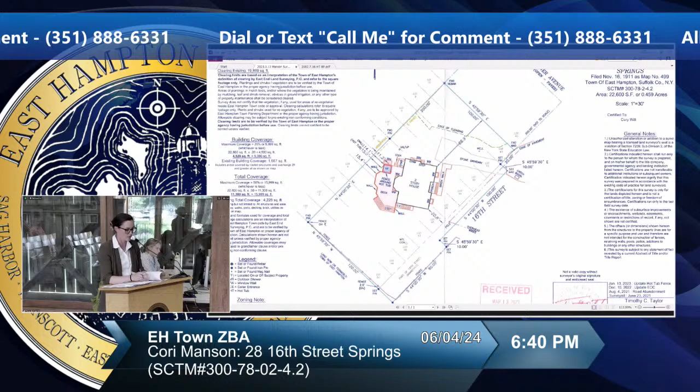Of course. Was the hot tub built where the permit was given, or did it deviate from that? I apologize for cutting you off. I do believe that the previous permit was submitted for the same size hot tub. I know that the deck at the time was a smaller deck, I think it was 400 square feet.

Now this deck is, I believe, 900 square feet. I can have Ms. Manson speak to that if you'd like, because she's here. Yeah, just to see if it's in the same location and the same size, right. Probably, some of the submitted plans or survey at the time would show that.

Manson, at that time her last name was Witt, I believe. So this is still the same applicant, same owner. I just think it was an issue of cost at the time. And then in 2020 she was able to do that.

And then she just didn't apply for the new permit until after it was constructed. And we have it here. That's the proposed one, Morgan? This is the building permit survey. Is the building permit the same numbers for the hot tub and the deck at that time as now? It seems like it's in the general area.

It's really hard to tell, I don't know if it's like this round thing here. This is just what's associated with that 2002 building permit. It's kind of hard to tell. It looks like it's kind of in the middle of what was supposed to be the deck, but I'm sorry Morgan, I can't hear you. It's just hard to tell based on this, this is the only survey associated with that 2002 building permit, and it's just not super legible. So it's kind of hard to tell. There's maybe a little sketch here of where it was supposed to be, but it's just hard to say definitively where it was proposed to be.

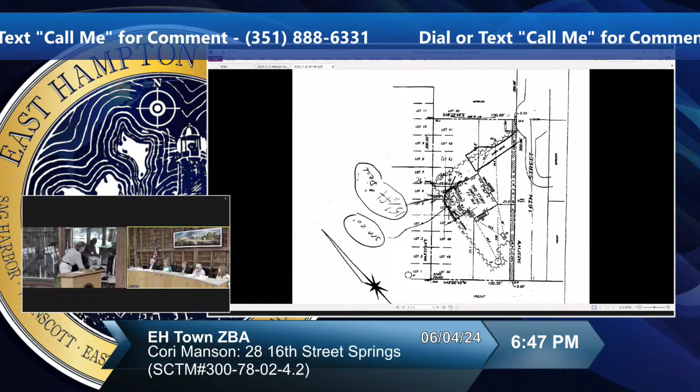It's kind of a mixture of shrubs and oaks. There's really two affected neighbors along this property line because it's quite long, but there's only like one actual residence that would be impacted by the variance.

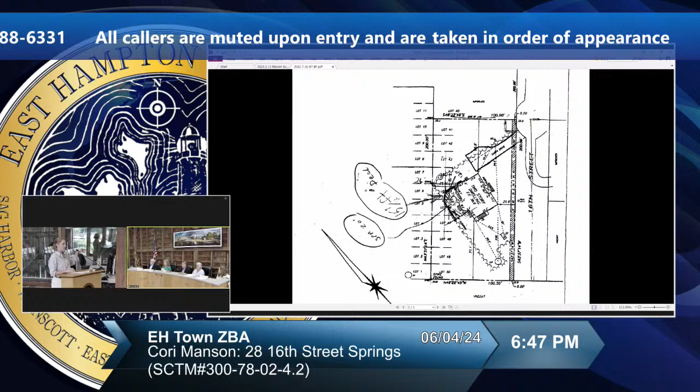Good question about the amount of decking. On those two permits that expired, it was 400 feet, and then there was a subsequent permit in 2018 for 900 square feet. Let me pull up the permit - so was it the 900 that was built, or is it a total of 1,300? Let's see, so in 2018 it was 900 square feet, which I'll pull up so you can look at the plans for it.

That seems to be accurate to the existing conditions on the property. Obviously they don't have a CO for the deck right now, so it's kind of hard to say exactly what the square footage is, but this appears to be close to what is there on the property today, and it's for 900 square feet. So it's not 1,300 - that 900 includes the 400.

I don't think the 2002 building permit - it was closed in 2010 because the work was never initiated. So there wasn't a deck, or maybe a smaller deck, until the 2018 building permit was opened, and that is the deck that is currently there. The hot tub was not actually there in 2002 - the work wasn't completed. The 2002 building permit was for a hot tub and a deck, but that work was never initiated, so it was closed in 2010. Then another building permit was opened in 2018 just for the decking, and then the hot tub was also installed.

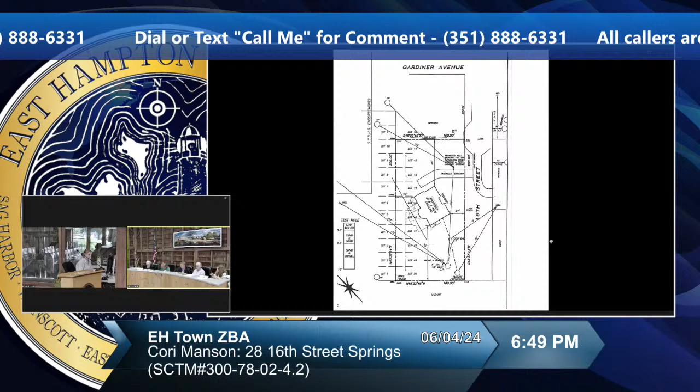Can I just clarify - I know that the hot tub size makes it classify as a pool, and therefore the pool on the deck means it's a pool deck, so the pool deck has to conform to the setbacks. But does that whole 900 square feet have to conform to the setback, or is it just where the hot tub is?

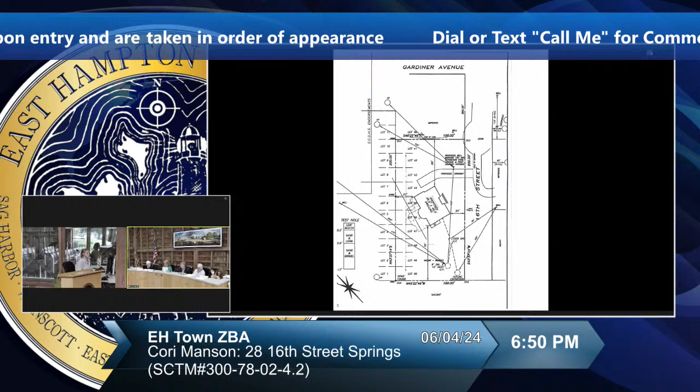Well, the relief sought is the maximum variance that's requested. So if you approve the variance that's requested, then you'd be approving anything that has a larger setback.

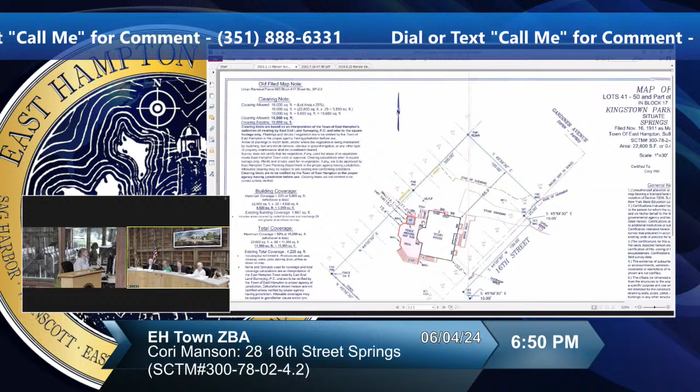Okay, any other questions? No. Thank you, Morgan. Counsel, do you have anything to add?

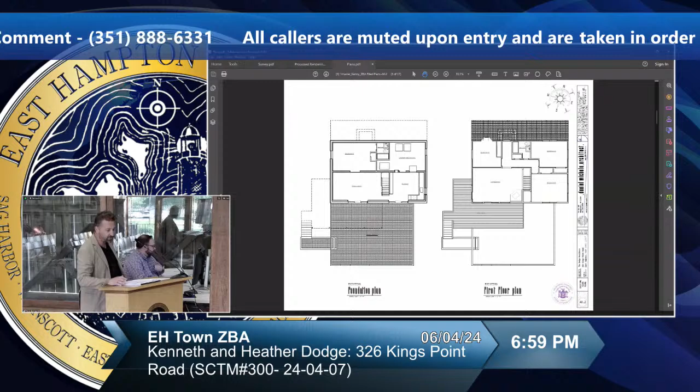Tyler, if you wouldn't mind putting page 3 of the PDF plans. So here we can see the existing ground floor is on the right. Here we have 3 bedrooms, a bathroom, family room, and a deck. And then the finished basement is on the left, contains the kitchen, the dining, the living room, the laundry, and the master bedroom. And you can see that large grade level brick terrace at the back there.

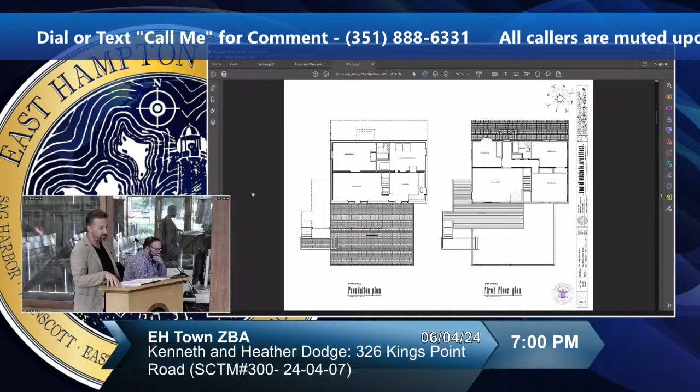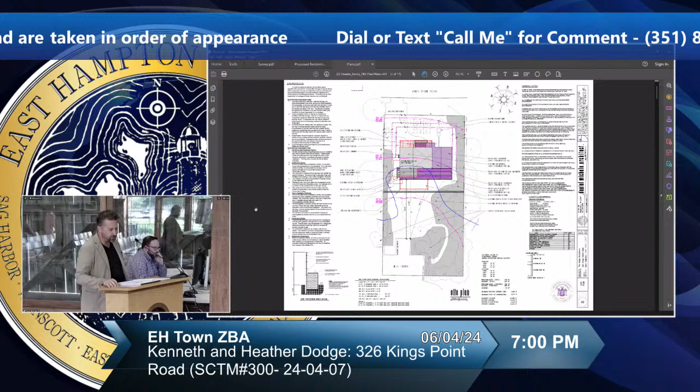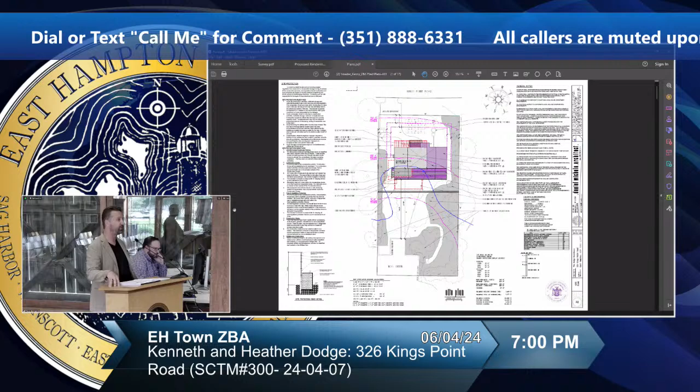So we explored the idea of renovating the existing home as it was, but became aware of the updated FEMA map. So the new flood line crosses through the back of the house, which means that there can no longer be any living space in that basement, as the floor level is elevation 4 in a zone AE5.

So our second concept was to relocate that basement space to the street side of the house and have all the living space on the ground floor. And you can see in that site plan, we have 15-foot East Hampton setbacks. This idea would have proposed any new construction on the landward side of the 100-foot wetland setback and eliminated the need for any variances. We would have still needed an NRSP, but no variances.

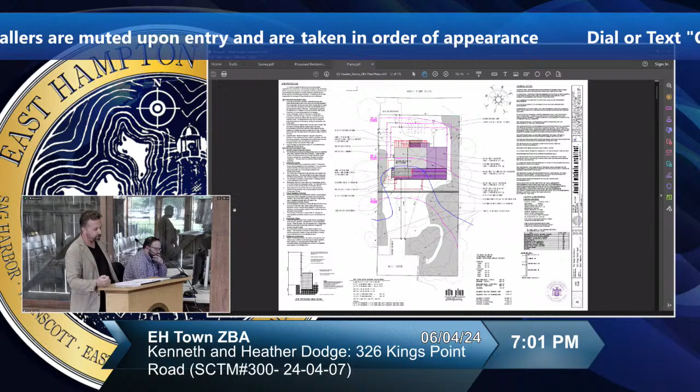But unfortunately, Clearwater Beach Property Owners Association has a 40-foot street side setback throughout the whole neighborhood. So that kind of voided that concept for us. So we went back to the drawing board and developed the concept we see here today.

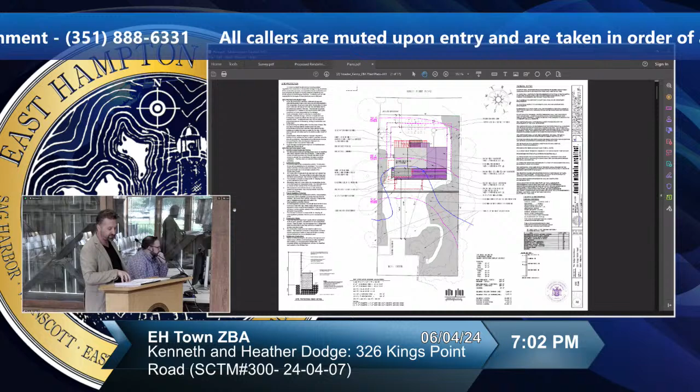We have a 702 square foot addition on the east side of the existing home, which aligns with the existing foundation, and a proposed 857 square foot second floor over the center section of the revised footprint. And we are proposing to remove the terrace and pergola along that entire length of the front and replace a small portion of that space with an entry porch and foyer.

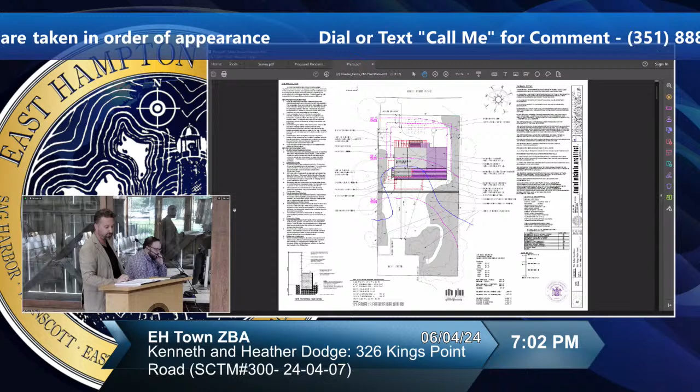And we're proposing to extend the existing deck across the back of the house while removing a portion of the existing grade level brick terrace that's on the water side. And this would increase the distance between the wetlands and constructed space from 62 feet to 74 feet.

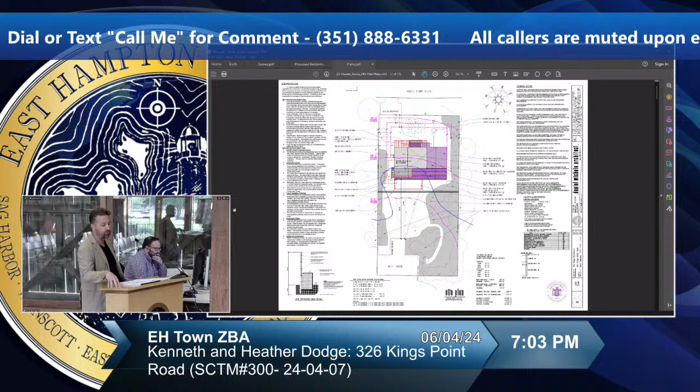We have included with this proposal the installation of a new IA sanitary system on the street side of the house, approximately 130 feet from the wetlands, as far away as the property permits, where the existing system was located on the water side, 60 feet from the wetlands. Prior to filing the application, the brick system collapsed and was no longer functioning. So we went through the emergency permit process and installed a new septic in the front yard because the house wasn't livable, but it was our intention to present that system as part of this application.

If we could turn to the next page, please. Can you just clarify what kind of system did you put in the front yard? It's a hydro action IA. Oh, it is an IA. Yeah.

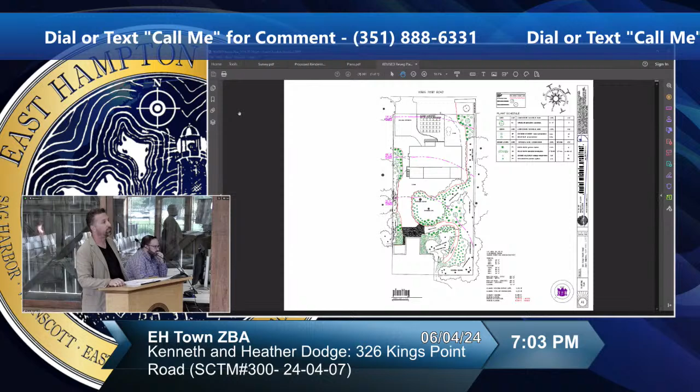So Dan, just so I'm clear on the basement, FEMA is requiring the demolition of it, and that's why you're relocating to other livable spaces. So what's gonna happen with the existing basement? It's just gonna be storage, for the kids' bikes and paddle boards. Because your application says it cannot be renovated and must be removed, but you just mean the living space of the basement? Correct. The structure remains, right? Yes, the structure will remain a basement for bikes and surfboards and baseball equipment.

So currently the lot is grandfathered 100% cleared, 18,345 square feet, where 10,000 is allowed.

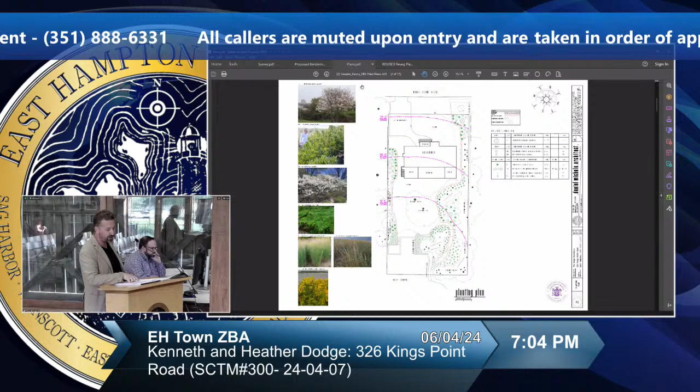This is the re-veg plan we submitted originally with our application, where we proposed 6,900 square feet of re-veg. After receipt of the technical analysis memo, we submitted an updated plan last week, taking into consideration the planner's recommendations, and we are now proposing 8,345 of re-veg, adjusted its layout a bit.

Oh, is that the updated one? Does that bring it into conformance with APA? That brings it into conformance, and a harbor protection, and adjust the clearing, attempting to curtail any runoff into Hog Creek.

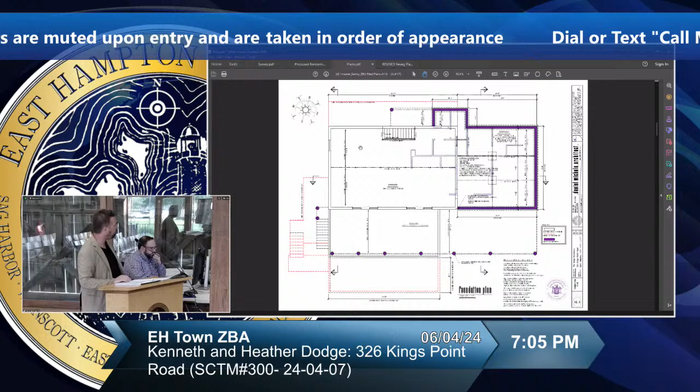If you could turn to page 5, please. So here we have the proposed first floor plan. We have the living, dining, kitchen, the entry mudroom on the north side with a half bath, and then the master bedroom on the east side. We can see the existing deck extending across the back of the house at a depth of 14 feet, with the center section of the deck covered by roof.

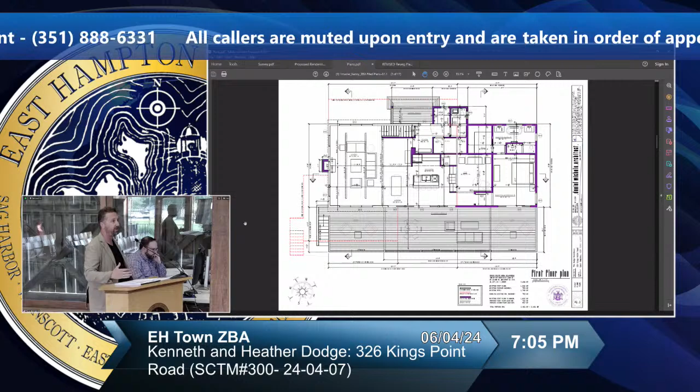This is the south side, so it's nice to have that shady space to hang out adjacent to the common living area. It gives a bit of solar heat gain reduction in the summer. We are also thinking in the future about a solar photovoltaic system that could be installed both on the porch roof and the main gable. It would bring us very close to net zero energy on this building.

If you could turn to the next page for me, please. Thank you. Here we have a simple second floor plan with 3 bedrooms for the kids, 2 bathrooms, and a small central hangout space for them. All the spaces throughout the house, first and second floor, are modest yet comfortable.

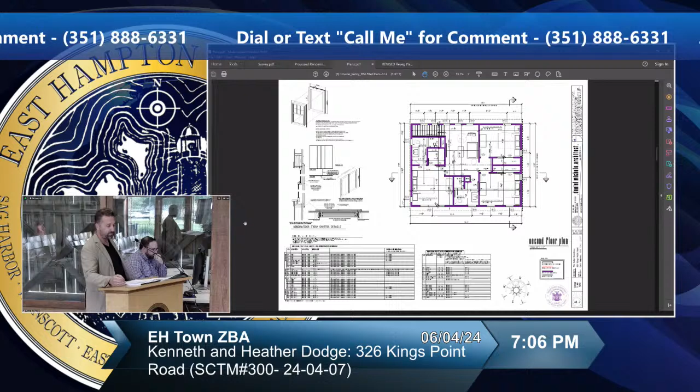As I said, the existing habitable space totals 1,786 square feet. That's the first floor and the basement with 4 bedrooms. When we calculate the proposed first and second floor, factoring in the removal of the finished basement, we are actually only proposing an additional 815 square feet of habitable space, and the house remains 4 bedrooms. We propose a total of 2,601 square feet of gross floor area, where 3,434 is allowed.

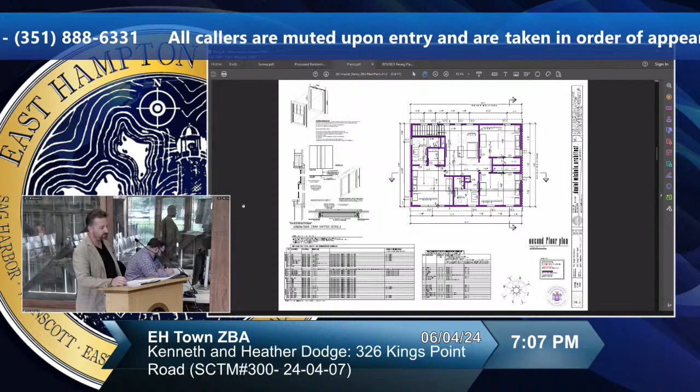This is 75% of allowable. We propose 2,297 square feet of building coverage, where 3,669 is allowed, and this is 62% of the allowable. And we are proposing 4,082 square feet of total coverage, where 9,173 is allowed. This is 44% of allowable.

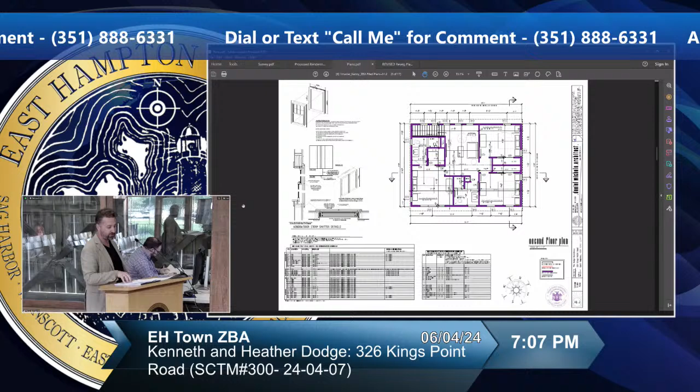When we calculate the coverage of the existing house, including the existing decking, terraces, and pergola, we have a calculation of 2,614 square feet, which is 14.3% of the total lot area. And when we calculate the proposed house, including the decking and porches, factoring in the removal of the brick terrace areas, we have a calculation of 2,838 square feet, 15.5%. So this is an increase of coverage of only 1.2% on the property, which we don't believe to be substantial redevelopment of this lot.

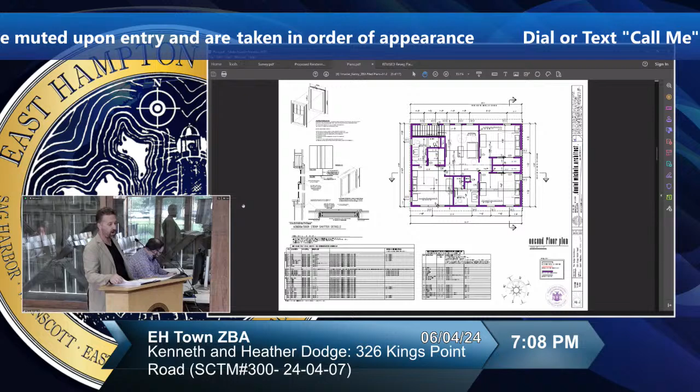If you could go to the next page. Go back, Tyler. On the left, that brick and sand patio that leads to the front entry, that's going to remain. We're eliminating that secondary driveway that you showed. That was a result of septic access, it was muddy, so we put gravel down. So the driveway you're eliminating is on the east side? Yes, on the east side.

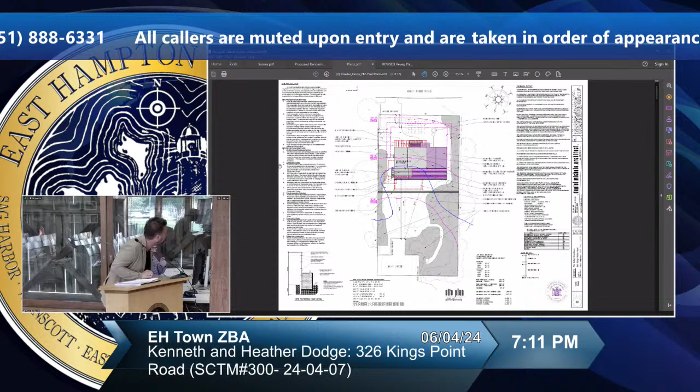Dan, I should have taken a picture of them, but the AC units are expected to be relocated, and you don't want to have to come back for a silly variance. So where are they going to be relocated to, do you know? Could you go to that site plan for me, Tyler? I think it's the first page. I didn't show them on there.

At one point we were exploring geothermal, we're not sure if that's in the budget yet. Just trying to make sure it's in compliance with the proposal. So that'd be probably another 60 square feet of coverage if we go with a heat pump system. Just want to make sure it's in a place that's compliant with code.

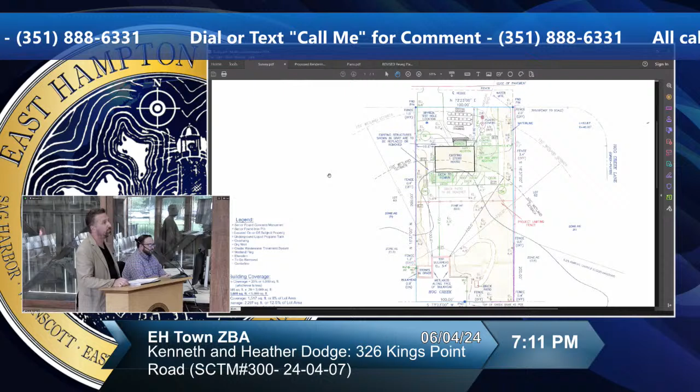So with that, you're proposing further re-veg, so there's going to need to be a survey. I don't think there's a submitted survey on that yet, right? Oh, we have a survey with the re-veg on there, yes. What date is that, is it the one we just got today? Oh, we just received it, just with the original submission. This was September 26, 23.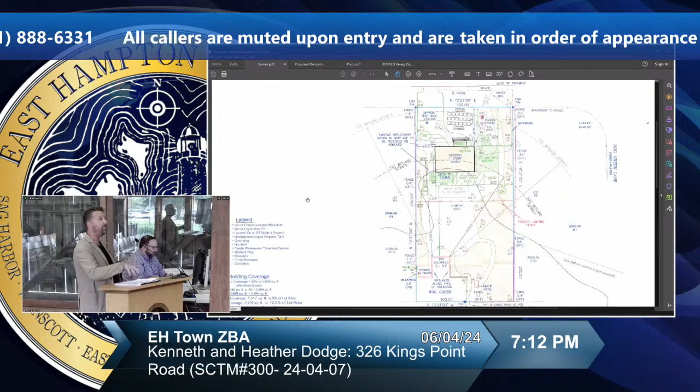I was handed it tonight. Where's the survey? I think this is it. The survey we have on file, unless it didn't get in there yet, is September 26, 2023. Is there a newer one? No, this one here. I believe he shows the clearing on there with the revegetation. But the re-veg plan I submitted last week, I don't have a survey to accompany that. So that's not on the survey yet.

No, the re-veg plan is not up yet. When was the re-veg plan dated? Last week, I believe. This is the one we just received, I think I have that.

Dan, my last question is, have you had an opportunity to look at the recommended project conditions, and do you agree with all of them? We do. All right, very good. Yes, those are all my questions, Chairman.

Any questions, Delory? Just one, I just want the date on that re-veg plan. This one right here, the one we just got. March 29th, I think, May 29th, 2024. Okay, do we have that in the file?

Sorry, might have missed what you got handed tonight, Terry? We got it tonight, I didn't see it was there. Oh, it is. Okay, sorry, never mind, just got it.

Received it, thank you. Can I just ask you presented these images, these renderings, and are they accurate now? If they weren't done a while ago and there's no changes, is this the building I'm looking at? Correct, haven't been any changes since then. No changes, no. The only thing is the condensers.

Can I just double check on setback? You mentioned that Clearwater has the special 40-foot deep front. Are there any differences on side setbacks in Clearwater relative to standard code? Just double checking, they're actually less stringent. It's like 10 feet on the sides and it's 15 here. So you're meeting town setbacks. Correct. Okay, any other questions? No, I'm good for now.

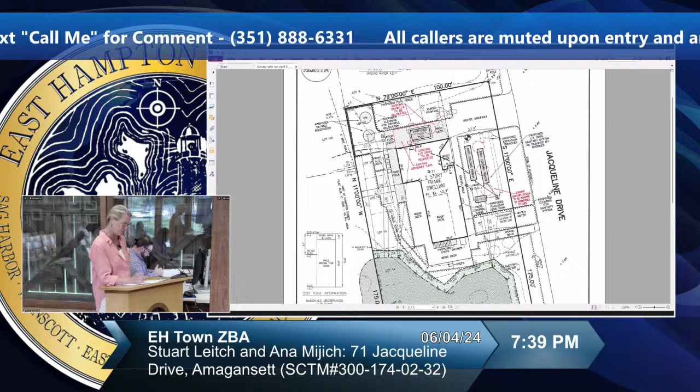While some of the variances are substantial, the owners are going to remove the stone walkway and the gravel, which are closest to the wetlands. There will be no adverse impact to the environmental or physical conditions of the neighborhood.

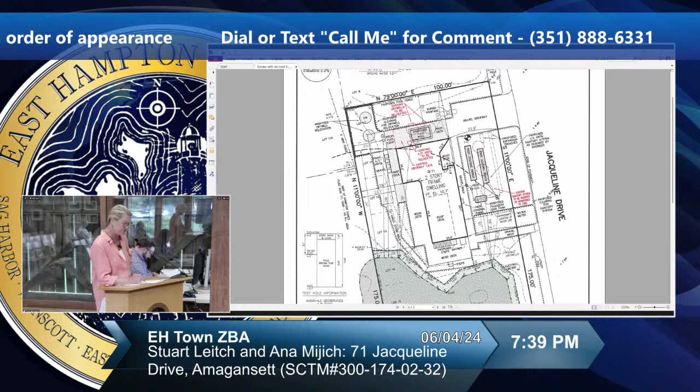In fact, the septic system upgrade to an IAOWTS will be an invaluable improvement over the existing conventional system, and the proposed 5,200 square foot scenic easement will safeguard the wetlands in perpetuity.

While the hardship may be self-created, this should not preclude the granting of the requested variances. All of the recommended project conditions would be adhered to, including project limiting fencing, retention of soil for backfill, revegetation, covenants and restrictions, and a substantial scenic easement.

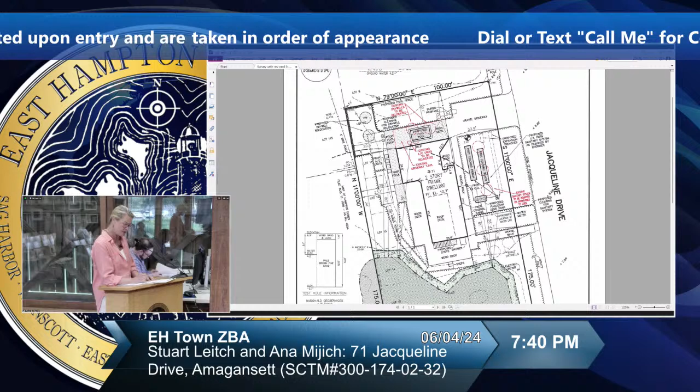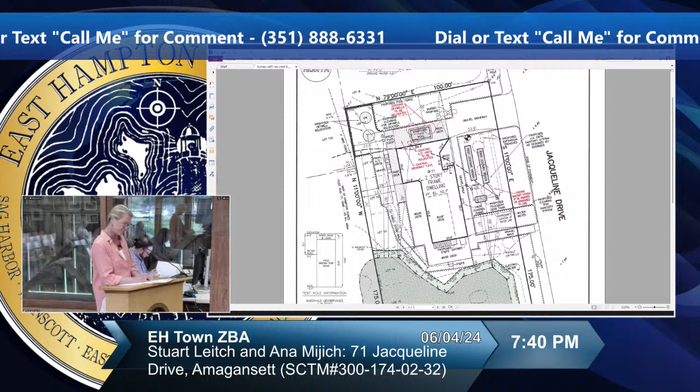Finally, the applicants have letters of support from 3 of their immediate neighbors at 56, 70, and 81 Jacqueline Drive, which have been submitted to the record prior to tonight's hearing and are attached to your packets.

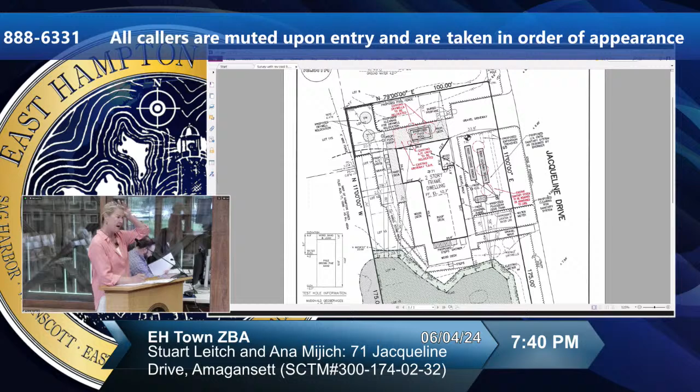I will make myself available for comments, but I know that Mr. Leitch would like to address you as well. Okay.

Anybody got any questions? No, I'm fine.

I'm fine. I do. I have some questions because I'm going to be referring to the 2017 determination, which, if you read it, is very concerned with the wetlands and the constraints of this property. Remember, this property is not only about wetlands, it's about dune and dunescape.

So Stuart's going to speak to that a bit. The property is highly constrained by that. And if you read the determination, throughout it, the applicant at this time was doing things to protect the wetlands, to protect clearing, to do that. But they removed a deck that was actually essentially in the wetlands.

Let me just finish. This is a recent decision, which means that this property went under great scrutiny. And I think that the board needs to give great deference to a previous determination. Just wanted to say that, but we are, I think, struggling with the application because of that.

Okay, well, I know that previous decision removed a deck that was in the wetlands and allowed them to build a deck further back. It was a replacing kind, and yes, they removed the shed and stuff like that to protect the wetlands.

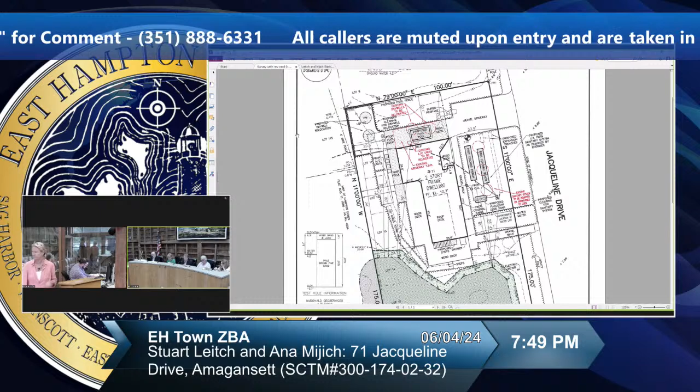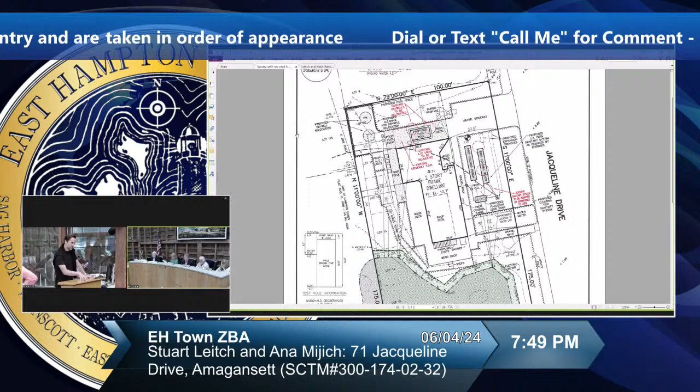There's a very mature oak on the front of the property—is that going to have to be lost for the sanitary system, just out of curiosity? From what I understand, Jen, no, I think it stays. I think from the pictures you can see it's a little more towards the house and a little further north, so I don't believe that's impacted.

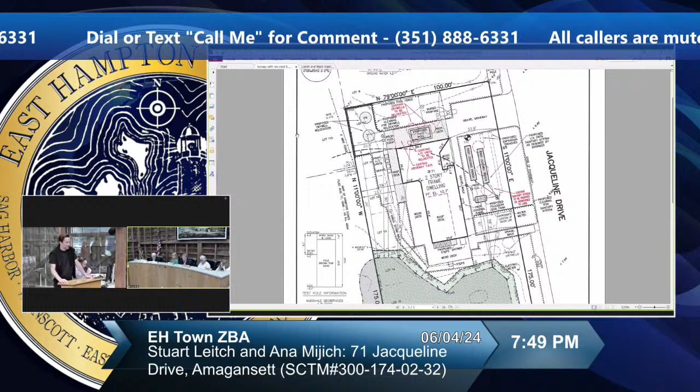And again, I'm going to refer to the conditions on the previous determination. If you look at the condition, the zoning board at that time paid particular attention to the clearing and the vegetation—words like 'strictly adhered to' and stuff like that. You have to understand, the dune land character here is of preeminence in the town. It was one of the reasons the town developed the NRSP, along with wetlands. So I think we're going to take this decision very seriously and weigh it.

I think, given that the main clearing is where the septic upgrade is going, the septic upgrade is a huge benefit for this neighborhood and this property and this wetland. I also think the scenic easement and the perpetual protection of the wetland is really important. And I do believe that with the revegetation, it's not going to be much different than what we've got now, other than a tiny 91 square foot plunge pool that's going to be placed on the property, not even excavated and dug in. It's going to be an improvement to the property and for the family.

All right, thank you. Tyler?

Tyler Borsak for the Planning Department again. The subject property is situated on the west side of Jacqueline Drive in Amagansett. The property is currently before the ZBA seeking approvals to construct 669 square feet of decking on the north and west sides of the existing residence, construct a new 7-foot by 13-foot swimming pool with equipment and fencing, install a new IA sanitary system, install new stairs over existing decking on the south side of the residence to the roof deck, and relocate and install new AC units on the west side of the proposed decking.

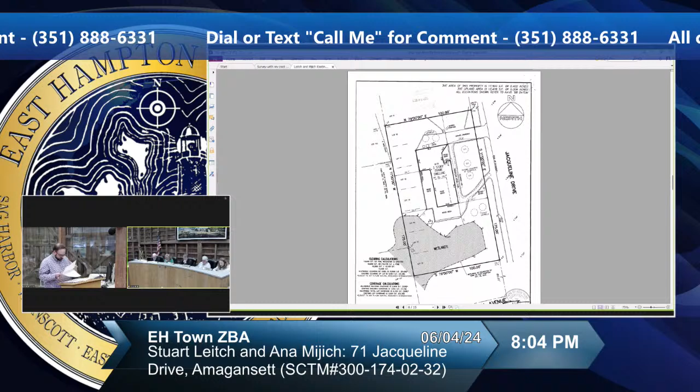I'm still trying to add it up, and forgive me, I'm not calibrating off of the new survey, which has a little bit less clearing than we've been working with all along. I'll take that into account separately, but the 2,000 square feet of additional clearing that was proposed, I'm trying to add up all the parts that are being cleared that add up to an extra 2,000 square feet.

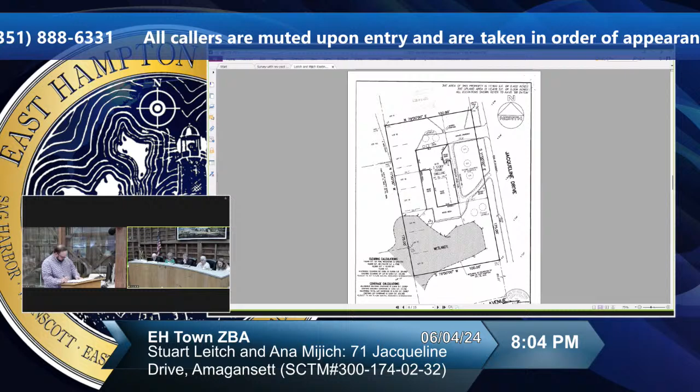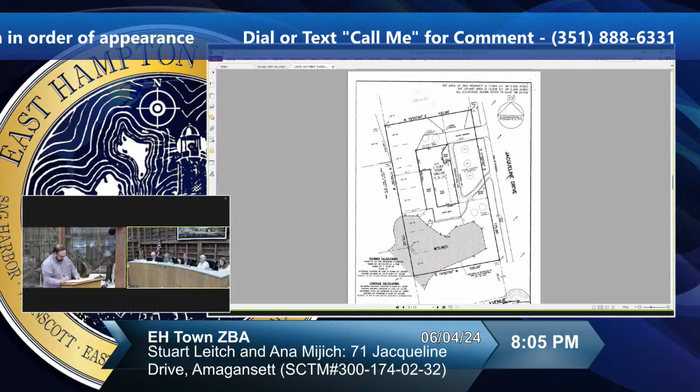Well, if you take a look, in the existing condition there was a revegetation plan. You can clearly see where that clearing line was. No, I'm talking now about what's proposed going forward. I'm looking at the current survey, not the one we were handed tonight. There's 2,000 proposed clearing, 8,017 versus existing clearing 5,942. So I'm just trying to figure out if I take all the parts that are being cleared, I'm not quite sure how we get to 2,000.

A large part of it is the sanitary system installation, which is now beach grass. So they were correct, this used to be a circular driveway, and the gravel that remains was part of that circular driveway. It was then made into a regular driveway with just simple walkways with the same gravel, and then revegetated, planted. But now we're going to have to clear that in order to install the sanitary system, and then we'll have to replant it.

Okay, so maybe that's what's confusing me, because I think about that sandy part in the front as being cleared. So you're saying that's not counted as cleared now, it's obviously going to be cleared temporarily to install the new sanitary system. Then you can really only revegetate that with grass. So I guess maybe the increase in clearing isn't as big as I think it is. If you're saying that the area over the current sanitary, that sandy part in front, isn't counted as cleared now? Correct, it says beach vegetation on it, even though it's sandy.

Okay, so I'm going to suggest that we hold this open. There's a few questions that have been brought up here that I would like to address. There may be some gravel areas that we're willing to give up. I would like to do a calculation, or at least show what will be revegetated, so that you'll see the number.

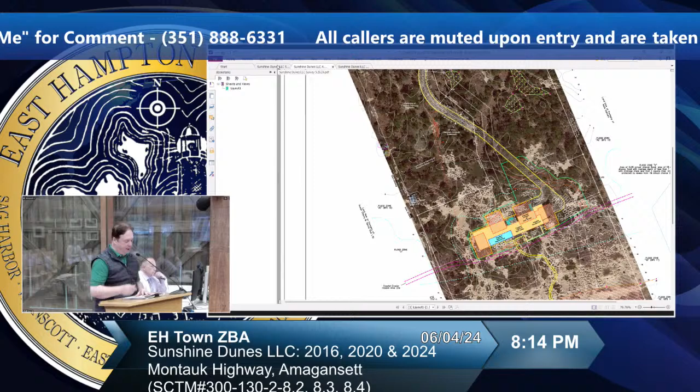The property is currently vegetated with maybe the most extensive Japanese black pine forest in the town, and it is kind of a maze. I guess last in fall of 2022, but I didn't bring any photographs with me. So it's kind of difficult to find your way, and you have to wind around between the pine trees. And obviously it's fronted by a primary dune and a very beautiful sandy ocean beach.

So the application is to build - first of all, there are 4 lots here owned by the current owner. The northwesterly lot is not part of the current application; nothing is proposed to happen there now. The 2 oceanfront lots and the northeasterly lot, combined as the full lot area, are about 7.35 acres. Those are all proposed as part of the application to be combined or merged into 1 lot. So when completed, the property we're talking about tonight would be a single parcel.

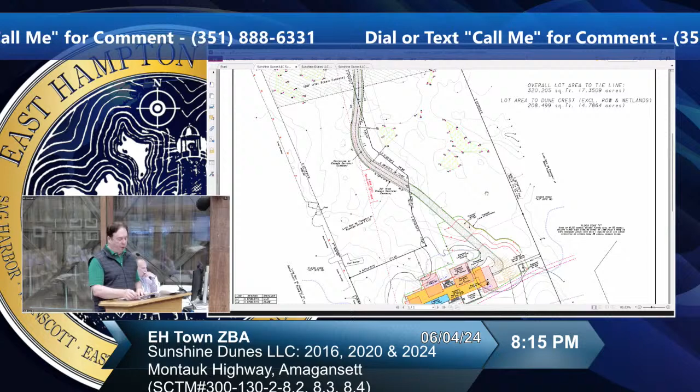That's 7.35 acres of zoning lot area, which excludes everything from the dune crest line to the ocean, as well as the wetlands, as well as the driveway easement. Even that is about 4.8 acres. So we're merging 3 buildable lots. The applicant is not proposing any variances except one, and that was mentioned in the hearing notice.

That is for the driveway gate. The driveway gate will be a simple steel bar gate to inhibit access to the property from anyone who doesn't have a right to be there, and even the posts are only 4 feet tall. There's a detail in the materials you have, so the gate does not require architectural review board approval. That's 42 feet or so from the wetlands, and that's the only structure on the property that would require a variance - a wetland variance.

So the house itself is proposed to be 10,503 square feet, 2 stories. There's a swimming pool, about 14 by 54 feet, which is 756 square feet, not particularly large. There are decking and terraces totaling some 6,319 square feet. Bear in mind that the decking and terraces are basically almost all on the roof of either the first or the second story of the building.

The only exception is a rock garden just south of the building, outside a family room on the first floor. Those are the only outdoor spaces on the property where you can really enjoy the outdoors unless you walk down to the beach. So there's no lawn, no sod, no play areas other than the decks and patios, totaling a little over 6,000 square feet. There's also a proposed unimproved pathway to get to the beach, and an IA OWTS septic system located east of the house. We've shown on the plan the areas that would be disturbed during construction.

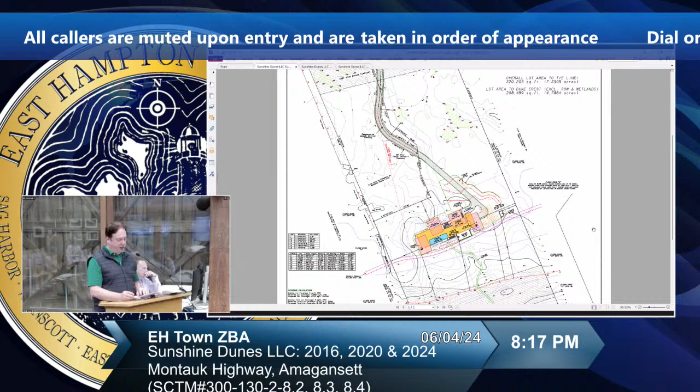We've built that in to show where areas will be needed for construction vehicles to be parked and construction materials stored. The house is not within a CEHA area - the property includes part of the state coastal erosion hazard area, but all improvements other than the unimproved pathway are north of the CEHA line. We have a state permit, not a CEHA permit, since we're outside CEHA jurisdiction, but we do have a tidal wetlands permit from New York State, which we've had for over a year.

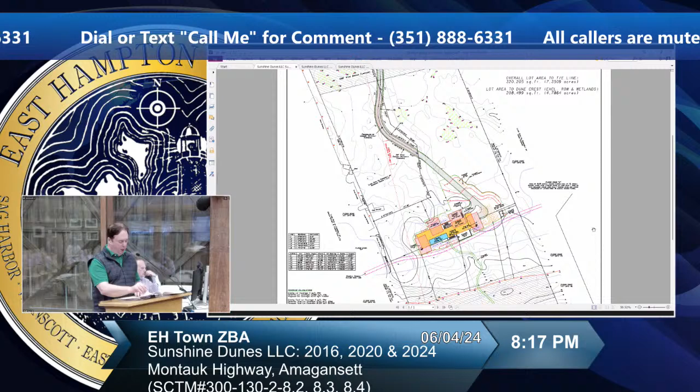At the end of the day, is that the line? There's an aerial, Brian can pull that up - a West Chin Architects aerial overlaid on it. If you can see the yellow line, which hugs very closely to the house itself and follows the driveway, that would be the total clearing at the end of the project.

Despite the fact this is almost 7.5 acres in size, total finished clearing will be about half an acre, 21,550 square feet. We have a revegetation plan by James Grimes, who uses beach grass, some bearberry, and shrubs including bayberry, beach plum, eastern red cedar, shadbush, and he's actually proposing 6 American holly trees.

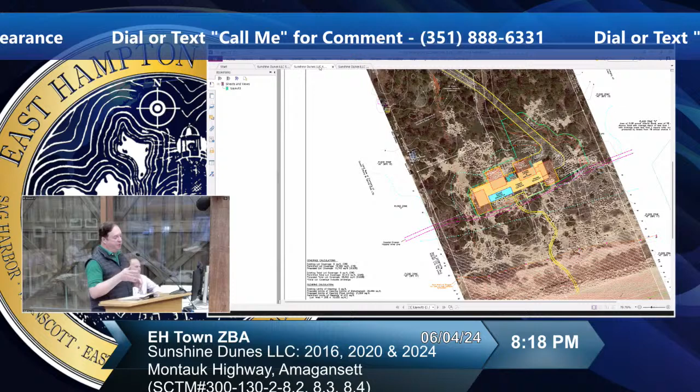The application - we just made some slight amendments a week ago and submitted materials to you last Tuesday. I'd like to identify those for your notes so you know the latest plans. The latest survey is by Saskas, dated May 22nd. Everything is 2024, of course.

The aerial site plan that Brian brought up is by West Chin Architects, dated May 28th, 2024 - I think that was the date of our submission. The floor and elevation plans, the latest ones, go back to December 18, 2023, and were revised on May 28, 2024.

The sanitary design is by Edward Armis Engineering, revised May 22nd, 2024. The James Grimes landscape plan is dated May 23rd, 2024, and there's a revised construction protocol dated May 28th, 2024. This project has had a fairly long gestation.

There was an architect involved before West Chin Architects. In the course of the application, I met with the various architects and Brian, I believe 3 times. Brian gave us a lot of his time - each of those meetings was like 45 minutes to an hour, and the project evolved in the course of that.

Essentially, the earlier design - I don't know if you have a copy in your file - originally had more disturbance on the west and northwest side of the currently proposed house. There's a very nice back dune area on the western side of the property, with open sand mixed with bearberry and beach heather, an area that Brian really wanted to see maintained and protected, which he expressed to us in person.

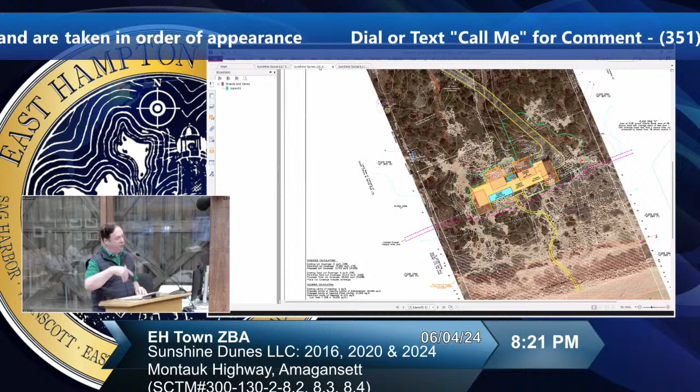So the changes made in the recent submission were the shift of the generator to the eastern side. That leaves an undisturbed area west of the house to the west property line of more than 80 feet in depth - I think around 88 feet. So there'll be no disturbance at that far western end, preserving some of that back dune area.

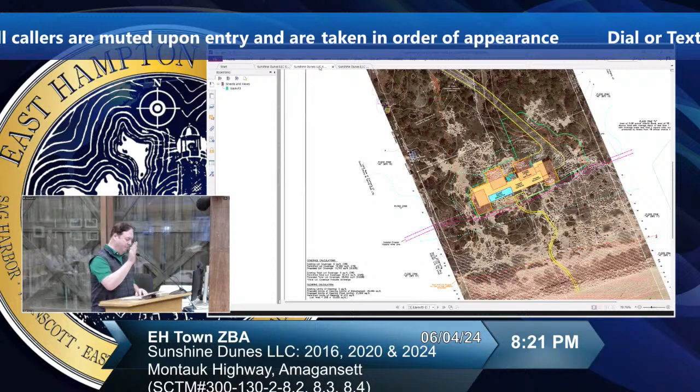The survey was also changed. There's a connection to the second floor level, almost like a hallway, between the second story master suite area and the next node to the west, which is the kitchen dining room area. That was omitted on an earlier survey, so it's shown today - it's always been included in GFA.

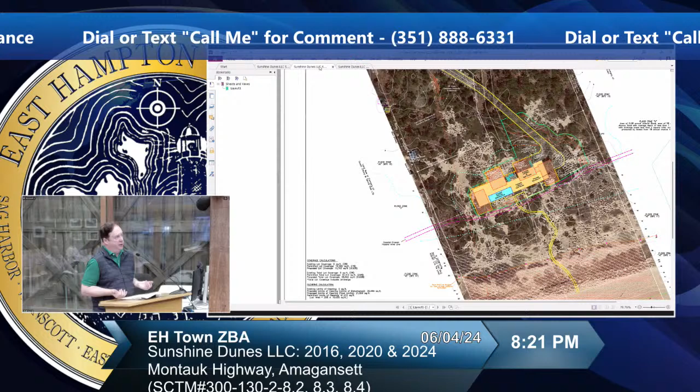The driveways around the house, particularly to the south, were pulled in closer to the structure. The house will be on pilings, to minimize overall disturbance and make sure there's no risk of ground disturbance near the state CEH line.

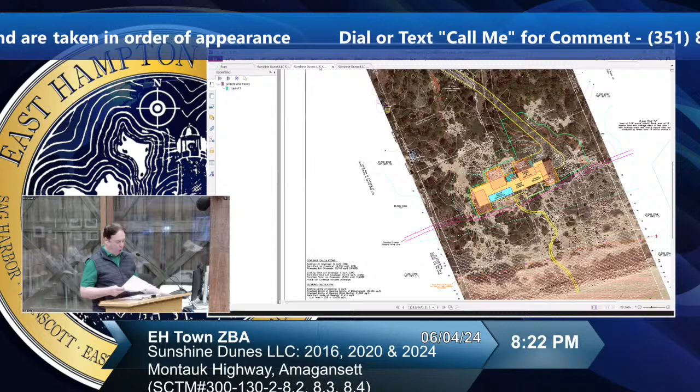And then last but not least, the driveway was widened to 16 feet in width. That complies with the town zoning code requirement for driveway width beyond a certain length. That's in section 255-11-88, driveways, gates, and pillars. So let me just quickly address the proposed conditions of approval.

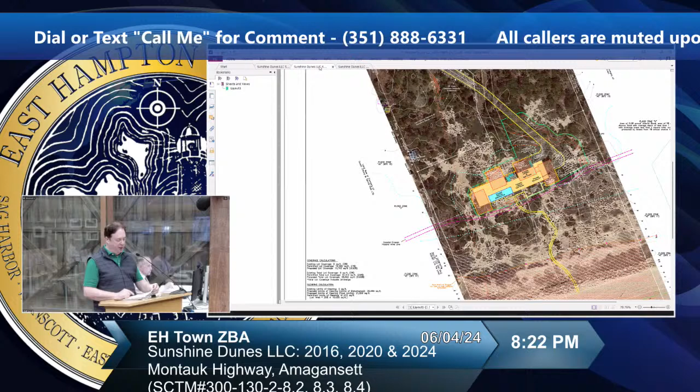First of all, we don't really have any problems with any of the proposed conditions in the TAM. Number one, we did amend the construction protocol, which has already been updated to contain two items that Brian mentions in the TAM. One of them, for example, was the retention of native soils on site for use in backfill and so forth. The construction protocol has already been amended to include that.

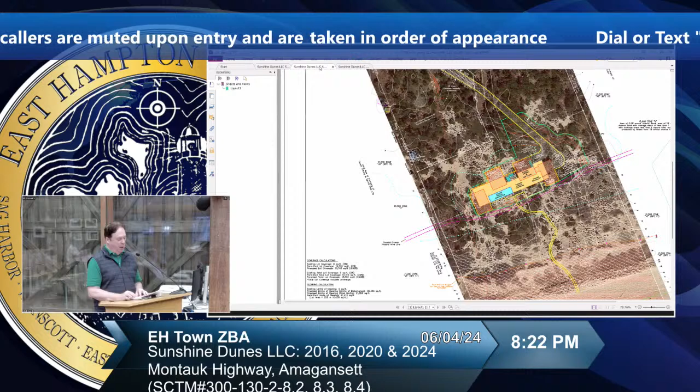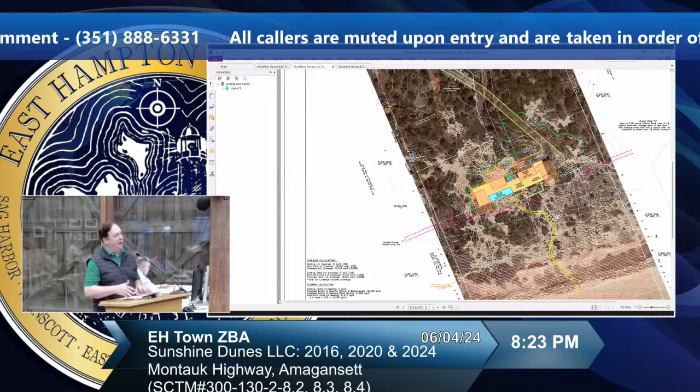I'd like clarification on two points from the board before we're done. One is the grant of scenic easement. Brian wrote that up and talked about the timing of it. Basically, we'd like to get a building permit as soon as we can. We'd like the scenic easement to be conditioned so that we can apply for a building permit when it has been approved by counsel to the ZBA, rather than after public hearing. Actually, Brian wrote it two different ways in the memo.

Secondly, there is a moratorium proposed to protect piping plovers during the nesting season. We'd just like to clarify, it doesn't state that that applies only to outdoor construction activity. We understand outdoor activity would be included, but if the house is framed in and they're doing work inside, I just wanted to make sure that's not covered by the moratorium. In fact, prior planning department memos have stated that.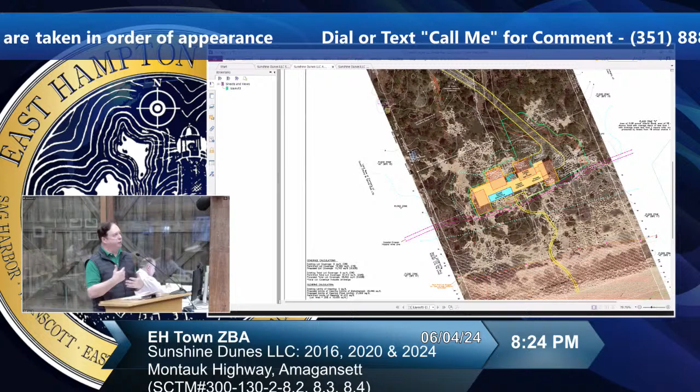And last but not least, presumably you want a large lot easement. That's actually not in the TAM, but we know you would want that. The large lot easement is the document that would effectuate the merger of the three lots — that's a large lot scenic easement. That too would have to be accepted by the town board after public hearing. So, like the scenic easement and the declaration of covenants and restrictions and the driveway easement, we would like those things, once approved by the board's counsel in writing by memo, to allow us to go and apply for a building permit, presuming of course that you approve the project.

So if you have any questions, I'd be happy to try to answer them.

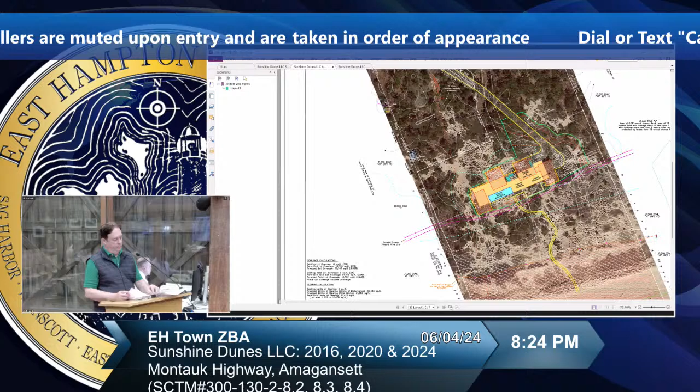Rick, one of the questions I have is, the construction protocol that we do have in the file, is that for an old project? No, it's been updated, it was updated last week. There's a new construction protocol in our file? Yes, it's updated. Okay, thank you.

One of my concerns on these types of projects, and I spent some time looking at it, is wanting to make sure that the contour of the existing dunescape remains after construction. Also, we want to maintain that character throughout the property. I did spend some time with the proposed contours, and it does seem like you are attempting to maintain that. But I just want to make that point this evening to the architects, as it's a very important aspect of this. Well, as I said, whatever soil is disturbed could be reused.

Yeah, we're disturbing areas around the driveway coming in on one side. And I see the proposed contours that are weaving it back in, bringing it back — yeah, that's right. They do show the proposed contours on the plan. Yeah, they do show that.

It was also suggested in the TAM that the pathway to the ocean should follow the path of least resistance, whatever the natural contours — that we would not be trying to climb over the highest part of the primary dune, that we would take advantage of the natural contours getting from the house to the ocean with any proposal. I think it does, though I didn't look that closely at how they follow the contours. I mean, you're absolutely right, it would be dumb to go over the dune. So we show a proposed pathway in there. I will say I didn't look too closely at it against the contours.

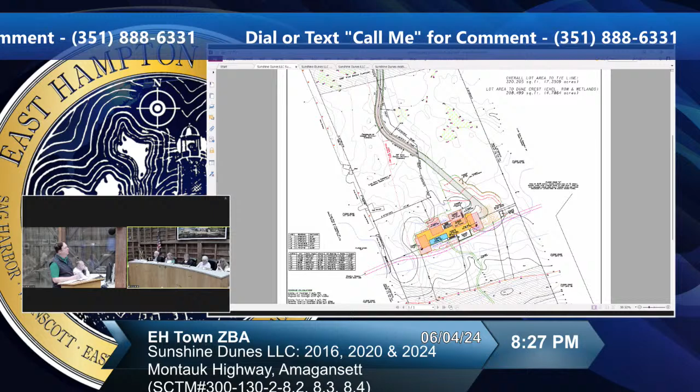Just to be clear, as far as whatever other disturbance beyond the structure itself, are there any hardened surfaces that are not in contact with the house? You're saying the decks and terraces we're talking about are incorporated in the structure itself. Beyond that, I'm not quite clear - is there any other? I'll point to it. Yeah, that area there, okay.

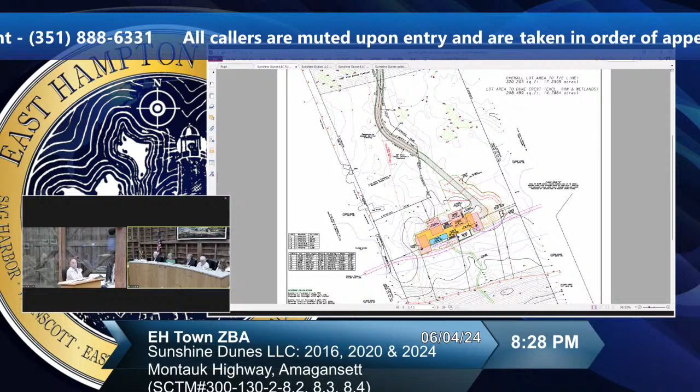There are a couple of cantilevers here, and the area under there will be vegetated. There's a lot of cantilevering, actually, on the north side - the full first story, and then the second story is like 4 separate nodes. The architects call them volumes.

The easternmost one, shown in red on there, is basically the master suite. The second one, which is to the north side of the building, is the dining kitchen area. The third one, which is a major cantilever to the north, is a bedroom area. And the southwestern one, western and southwestern, which also cantilevers to some degree, is also bedrooms.

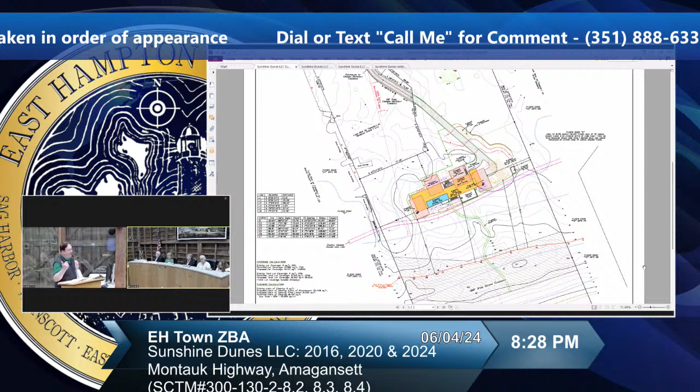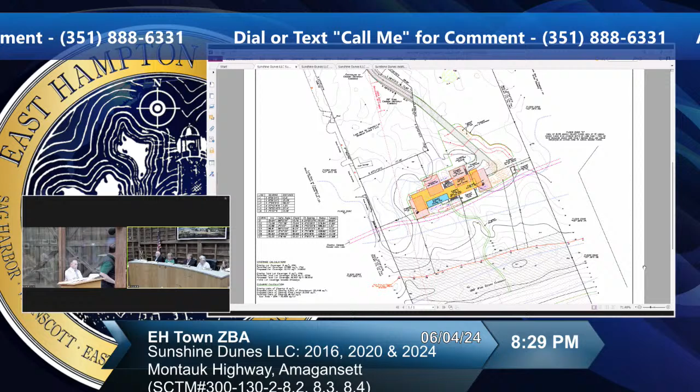So two of those second floor areas - I've had this conversation with Prudence Grun - they're going to use steel beams to cantilever those structures. So the only one that'll have supporting posts under will be the second volume from the east. The area under those - that will actually have a driveway going under it, so that's one reason to have support over it.

But the area under those cantilevers will reflect the natural contours and be also planted out. The plan is to leave that natural. Hopefully it won't be disturbed, because they should be able to do that work without even touching the ground. But if they do touch the ground, that would have to be restored.

Tim was talking about possibly moving it more to the east - would you have a comment on that? Yes, that came up in the conversations with Brian. The topography goes down as you move east. The architects looked at this - if we were to shift this further to the east, we would need height variances. If we maintain the same level, we would need a height variance for the building because there's a drop in elevation as you go to the east. So we don't consider it practical to go any farther east.

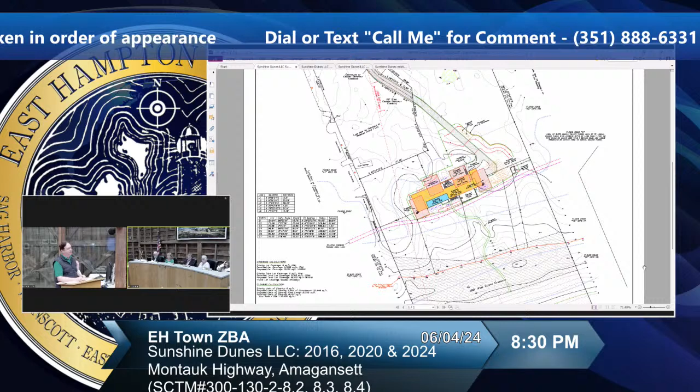Thank you, do you have any questions? I'm good, thank you. Thank you, Brian.

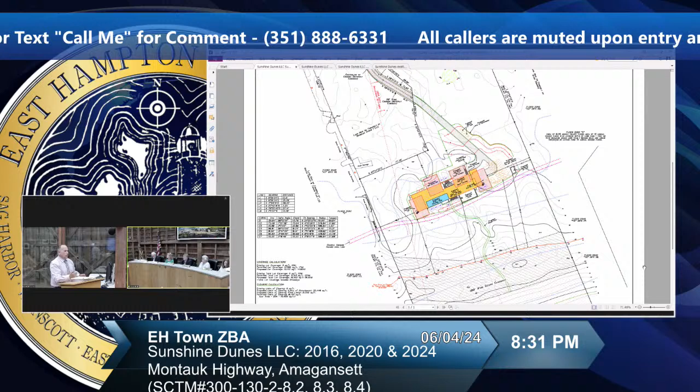As Rick had mentioned, these four properties made up a minor subdivision that was filed in 1982. It established two lots adjacent to Montauk Highway, a rectangular property, and two flag lots with a center strip access, running down the middle of the lot to two flag lots along the ocean. That subdivision established a scenic easement along the highway, presumably for visual purposes. I don't think the wetlands were identified at the time, and in 1982 the definition of what a wetland was differed from what it is today. Then there was a scenic easement along the ocean front, along what I presume was the dune crest at the time.

This is all part of the Napeague stretch, and Napeague is an isthmus that connects Montauk to Amagansett. Basically, in its overwhelming majority, Napeague is composed of either dune land or wetlands. The wetlands occur when the elevations are low enough to be close to the true water table. There's not a lot of, or any that I know of, perched water in this area—these are true groundwater fed wetlands. And when the elevations rise high enough, you get dune land.

Especially on the ocean side, you get habitats shaped by aeolian, or wind-driven, processes. That's what shapes the mosaic of vegetation communities—the different plant species, the bare sandy spots, the cladonia lichens that showed up in Member Meering's photos, as well as other dune heath species adapted to being sandblasted, baked in the sun, and droughty conditions that really kill the competition. Plants like bearberry, beach heather, and a host of others are specialists adapted for a variety of reasons.

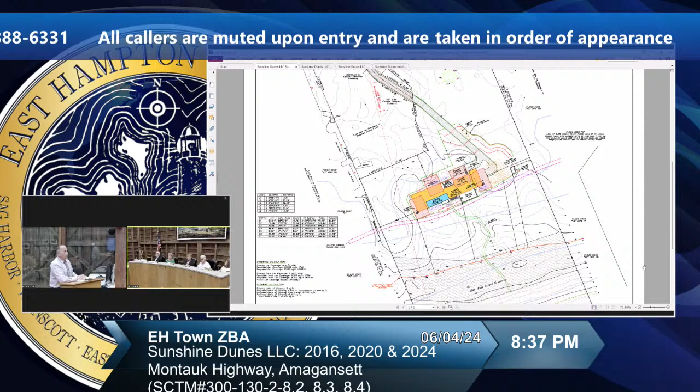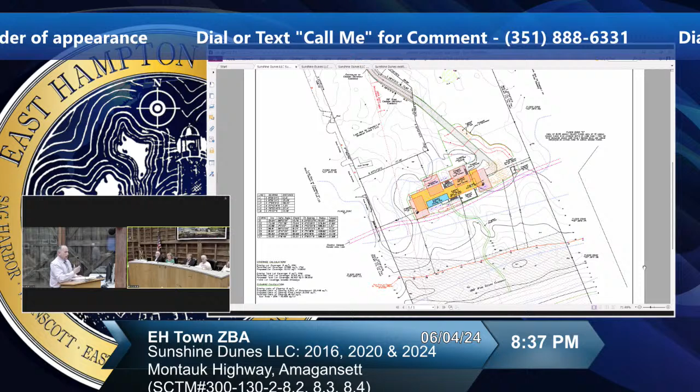As you go north and east, you get into lot 8.3, which is peppered with some freshwater wetlands. Lot 8.1 is very heavily dominated by black pine. I was struck by how prominent the black pine was when I did the wetland flagging - its canopy ends up dominating the landscape. It takes away the sun, changes the soil composition through shade and moisture, and favors other species. It just is what it is - a slow moving and quiet degradation of the habitat.

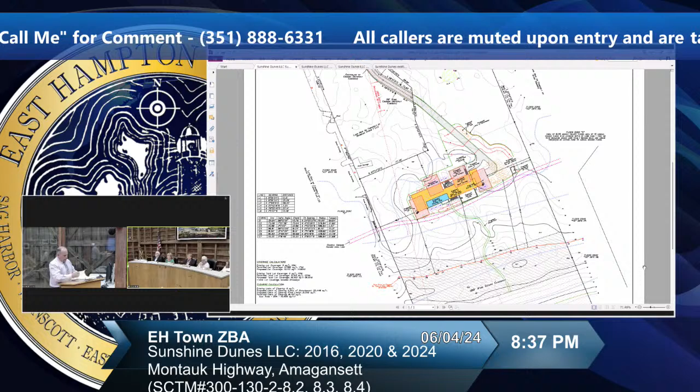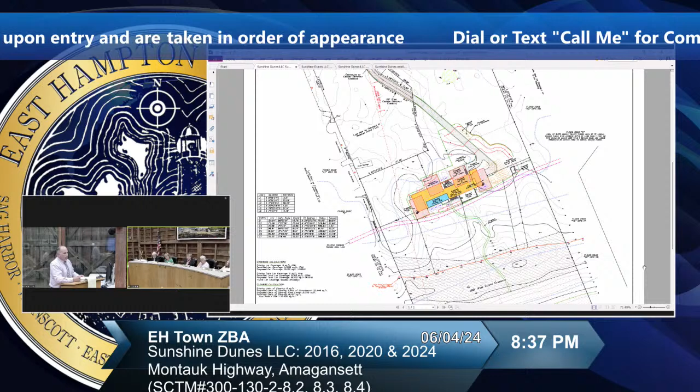I want to run through some of the mitigation, and I think Rick has done a good job summarizing a lot of that for any project that gets approved here. We don't often recommend that the project limiting fence location be located by a surveyor, but in areas where you really want to minimize clearing and make sure only authorized areas are cleared, this is an appropriate location to have that clearing boundary staked in the field by a licensed land surveyor, to make sure the 4-foot safety fencing and wire reinforced silt mesh is placed in the approved locations.

The applicant has offered the use of hay bales in addition to the wire reinforced silt mesh. I don't have an objection to that - it's a little bit of belt and suspenders. I do think that can be limited to just areas along the northern clearing boundary where the wetlands are to the north. Sand as a substrate is heavy - it doesn't move far and fast like mud or silt, doesn't get suspended that easy. So the risk of sedimentation is low unless you're on very steep slopes or have moving water to carry it long distances. I don't object to its use, but it could be limited to just areas along the northern clearing boundary. You definitely don't need it along the southern half, where you really have the intent to limit disturbance south of the approved construction to protect the habitat. The risk of sedimentation there is very low, and the wire reinforced fence is fine.